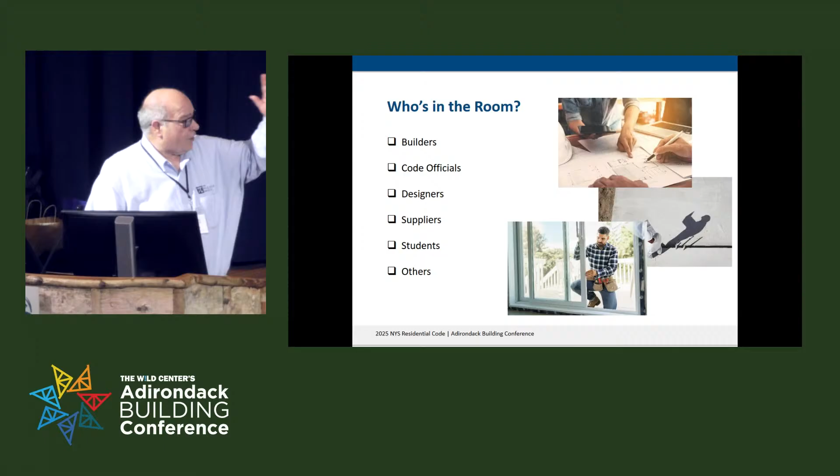In this new code, well, in your day-to-day work, but in the new code, what do you guys find is your biggest challenge every day building? I know the code officials, their biggest challenge is probably, I'm speaking for you, but there's a new code here. I've got to get everybody on board to understand what it is I'm asking for so we can start getting the plans. The designers, you probably are saying, what do I need to design? It would have been nice to know 6 or 8 months ago what I needed to do for my projects that are now. Would have been nice to have the tools like REScheck and COMcheck and so on already built.

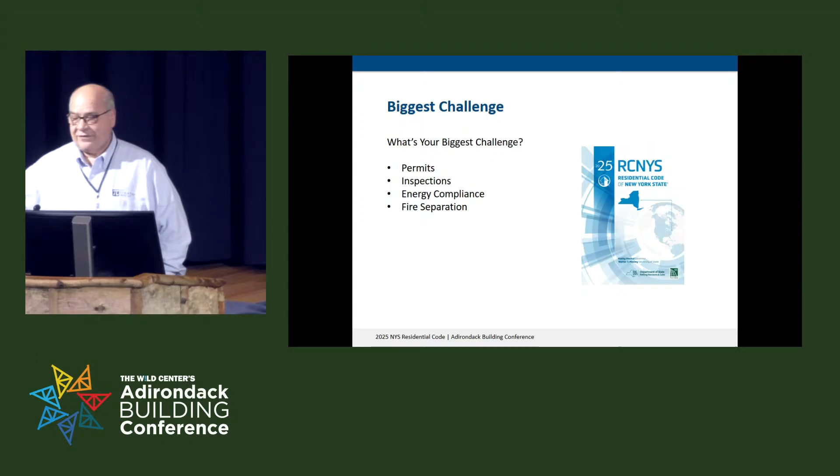They were in the works, by the way. I'm a private consultant, but I am a contractor for NYSERDA too. So I work with Chris Scroy, who was here this morning, and I can tell you that we had put all that stuff out for proposals. It was under contract, and we got it done as fast as we possibly could. You got to remember, the code really wasn't finalized until like September or so. So it was hard to get.

And plus, the people who do REScheck and stuff, they're also a government agency. If you can imagine how hard your life is, try taking two government agencies and trying to get them to agree to do something. Doesn't work. So anyway,

hopefully, maybe one of these four are your biggest challenge. We're going to talk about the fire separation part of it today anyway, because there's a new emphasis on some of that stuff as well. I'll try to keep the energy part out of my head, but they go hand in hand, and that's why I liked having the residential code with the energy code today.

We're going to cover kind of what's changed. We're going to talk about some changes with administrative requirements and documentation. We're going to talk about fire and life safety changes. And I am only going to mention energy code because I don't want to have to change my presentation every time I do it. And it's still in there. You guys got enough energy code today, but it doesn't hurt to reinforce a few things.

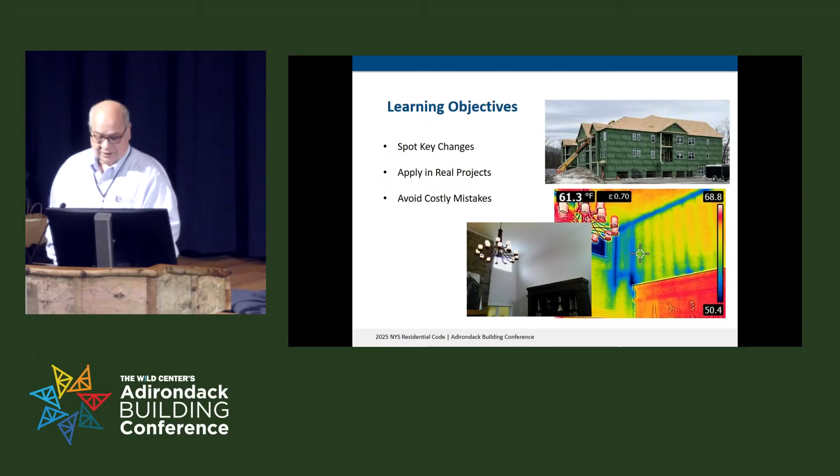So I'm hoping today you'll be able to spot the key changes in the code, because if it didn't change, we've already been doing it, let's just keep doing it, right? We'll be able to apply these changes in the code in real projects. We'll also hopefully be able to avoid costly mistakes. Avoiding costly mistakes is going to come from a lot of thinking about your project ahead of time, thinking about what's needed ahead of time. Your resources.

All right. As you all probably know, our code, the 2025 Residential Code of New York State, is a modified version of the 2024 IRC. Just like all our codes, they're modified from the International Code Council's. So that's your biggest resource, is our code. Don't follow the IRC so much. You want ours. There were a lot of significant differences in ours than there is in the ICC version.

However, having said that, one of the books I do like is the code and commentary from the International Residential Code. Even though that's not specific to New York, it is very handy for you. The commentary covers the explanation of why and really what it means. It kind of puts it in layman's terms for us.

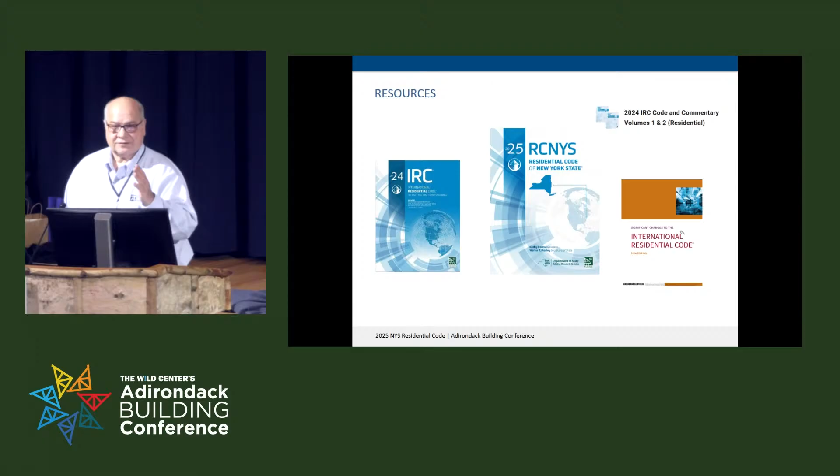And so that's handy. There's also a book that the ICC puts out that's called Significant Changes to the International Residential Code. That's a handy book as well. But again, remember, don't take it verbatim, because it is not the New York specific version. So my stuff today is based on these three things. How do you get the codes?

Now, if you're a code official, Kevin and I have been talking back and forth this week. NYSERDA funded purchase of a bunch of code books for the code officials. It's been dealt with through the DOS, and there was a survey that was put out last year sometime asking every jurisdiction how they wanted their book, whether it was a PDF or a hard copy. However you responded is how you got it.

The PDFs have all been sent out. The PDF rights or permissions have already been distributed. I believe the hard copies have not come yet or are coming. So if you're an authority having jurisdiction here and you don't have your book, if you replied to that survey, which I think almost everybody did, you should be getting it.

Yes. Thing about that, I was at a state training. Got our books. You should have your books for at least a month or two. They actually did a pretty good job getting them out to print, getting them ready, which I'm surprised. And it's nice that this time it's a New York version rather than having to go to the ICC version and then take our amendments and then take our past amendments and so on. But thank you for that.

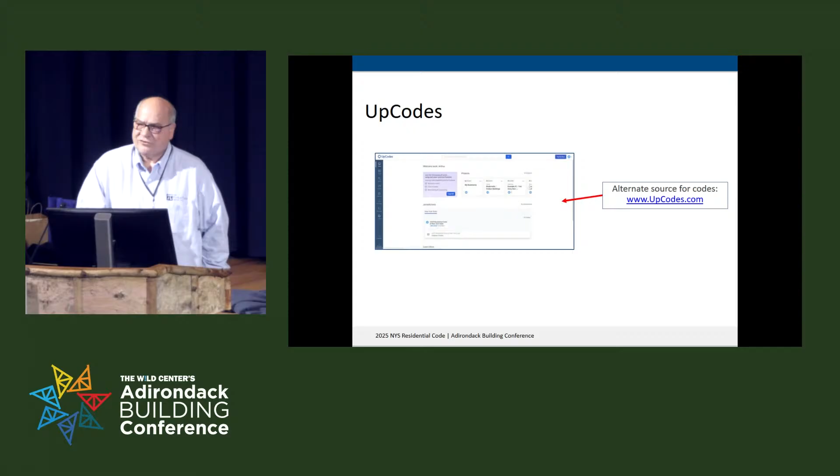If you have the subscriptions, they have diagrams. When you search their stuff, it's a much better search than the ICC, as far as I'm concerned. So that's another place. There's no excuse not to have the codes because they're available for free either place. Again, for code officials, if you didn't get them from the state, your department's got to pay for them. It's your tools, right? They got to pay for them. All right, so that's just a little bit on that.

Let's talk about some of the administrative changes. The first one is information on construction documents. Section R106 talks about this. Now, this is a little bit condensed, right? But if you go to the energy code, you're going to want to see a whole list. There's 19 items at a minimum that they want on the construction documents for the energy code. As far as our specific things, and these are all New York specific, they have to be clear. Clearly define the work, the location, the nature of the work, the extent of what's happening.

I've seen some plans, and I can only imagine what you code officials have seen out there. You talk about napkin sketches, that would be a good thing some days. Maybe some of this on bark, or a set of plans on a 2x4. Depending on what you're doing, that really doesn't work. It's also hard to file, right? Well, it's not hard to file with a file, but it's hard to file with your work files.

So the point is, give a good set of plans, right? Make them clear. Make sure they show all the work that needs to conform with the uniform code, the energy code, and other applicable stuff. We keep talking about manufacturer's instructions today, right? If there's something that's required, New York specific, fireplaces, right? The old fireplace boxes, they have to be UL standard.

All right? Otherwise, it's a waste of everybody's time and effort, and we're not getting anywhere. So make sure your required documentation is there, whatever is required by the code and specifically by your jurisdiction. Oops, too fast there. Make sure the drawings are to scale, right? It actually says that in there. Trying to move down to my notes a little bit. Make sure the dimensions are drawn to scale, legible.

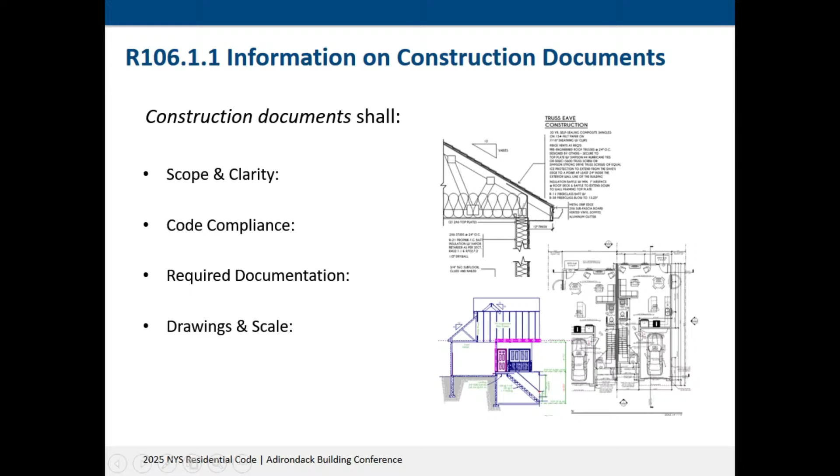Now, how many of the code officials here, does your jurisdiction take online permits? Ever? Good, good. If they don't, that's another program coming out from NYSERDA - we're setting up online permit application software for any jurisdiction in the state that wants to do it. So tell your bosses to keep their eyes open. Maybe they will, or if you're the boss, keep your eye open. Pay attention. We're going to be paying for at least a year of it and helping get set up and offer training on it and so on.

That's good news to the rest of us, right? It's a lot easier to submit things online. The clock isn't there. If you're in a jurisdiction where somebody's only there part-time or whatever, you don't have to wait till they're open and so on and so forth. But you got to make sure you scan that napkin before you send it in with the application. Otherwise, you can't just submit that in person, right?

And anyway, so that's the first part. Let's make sure that our plans are clear, the scope is well-defined, they show compliance. One of the things the energy code is going to tell you is you've got to choose the compliance path that you're going to be following. You've got to, in some cases, show a lighting power density now, even in residential.

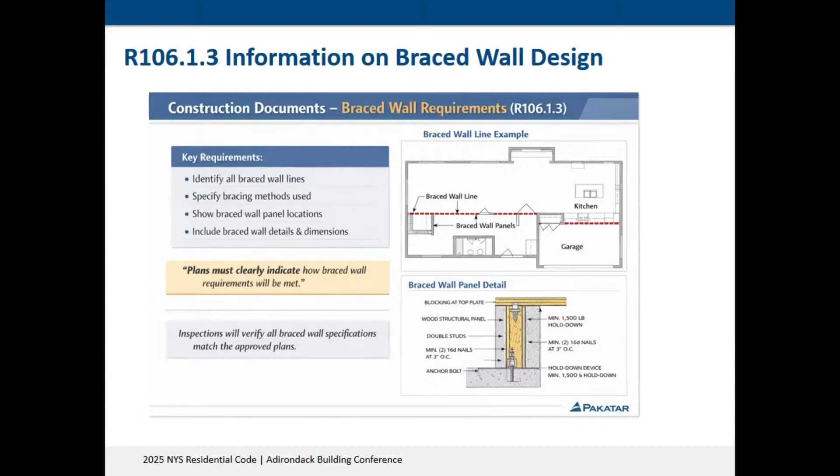The only reason we got a new code before then was because of the stimulus money, the ARRA money they were throwing around to get states to adopt new codes and save money and get to 90% compliance. And then nobody did anything about it, and our standards have all rolled back to before then.

Anyway, braced walls. It's up and up and up. Now we want the location of the braced walls shown, right? We want to specify the methods we're using, whether it's site-built or a panel. There's two different terminologies, so make sure you've got what it is you're going to do.

Show the locations, right? The plans have to clearly indicate that these requirements are going to be met. The inspections are going to verify all the braced locations and wall specifications. They have to match the plans, right? So there's another thing.

You're going to do the work early, so when they come out and inspect it, they don't say, where's your braced plan? Where's your braced walls? Where are they supposed to be? First of all, he wouldn't have given you the permit if you don't show them. So that's going to be your first delay.

Time is money, right? Time is money. The longer it takes to get that permit, the longer it is before you get that final payment on that house and close it, the more interest you're going to be paying while you're building it. So show the braced walls.

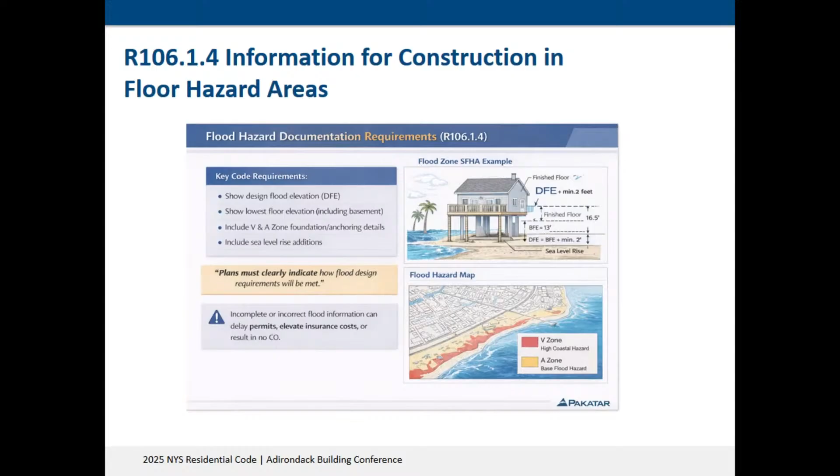If you're building in flood zone areas, you have to show the design flood elevation. You've got to show the lowest floor elevation, including the basement - what that elevation is. You have to include the V&A zone foundation anchoring details, and you have to include all sea level rise additions. So this is all part of building a more resilient home too, knowing where you're building.

Even those lakes - it's not just, I show a picture here of palm trees. We've got those here in the North Country, but I don't know, we don't have them in Albany. I just did that for here. Anyway, you must clearly indicate how the flood design requirements are going to be met. More information, clarity on the plans.

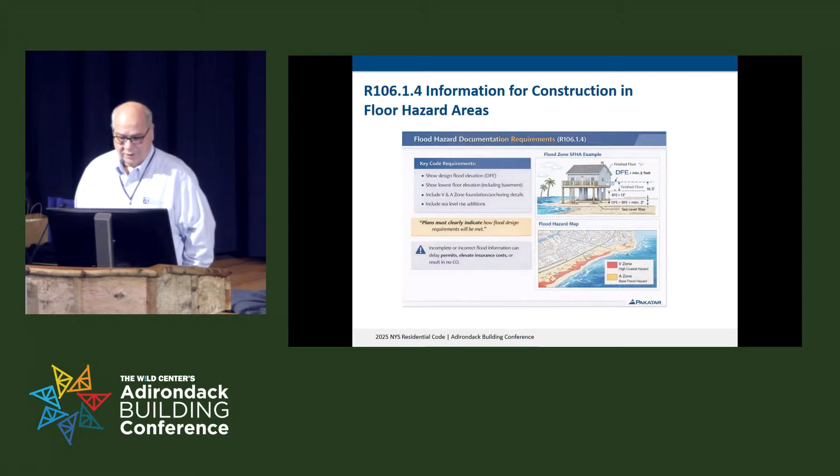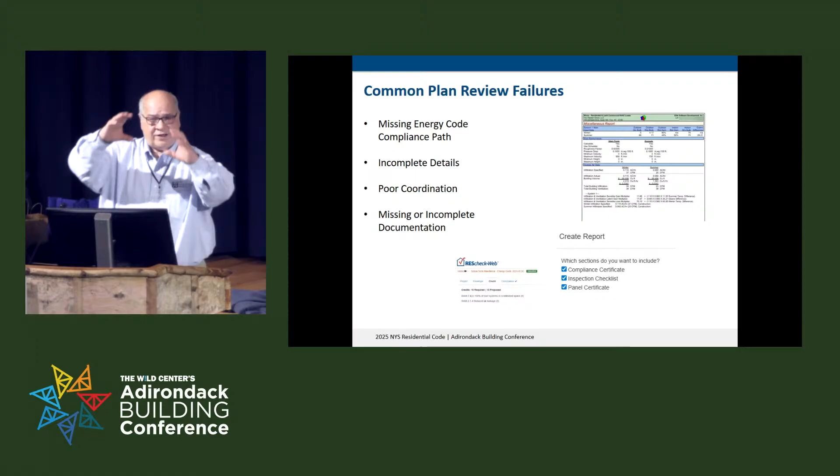You also have to show a detail where it changes from the wall to the roof - we've got to show a detail of that, right? We got to call it out, balloon that out or something. That's one of the incomplete details. If you just show me a red line, I don't know how you're going to make that happen. I want to know how that's going to happen, right?

My first job as a plan reviewer is to question. I'm not saying that I know better than the designers. I'm just saying that I need to know what your intention was. Because if I'm not figuring it out, how can I expect the builder to figure it out? Or how can you expect the builder to figure it out? And how are we going to know that it gets done? You don't want us all guessing and we get out there on the site and we have to fail an inspection, or whoever the third party is, if there is a third party.

So poor coordination, right? We're not communicating back and forth - who's doing what? Missing or incomplete documentation, same thing. Do I have the manufacturer's installation instructions? Do I have my manual J report? Do I have the Res Check?

This one image of the Res Check is where it tells me I've got my 10 required. I'm required to have 10, I've got 12 - proposed. I just took a screenshot. The other one is, what am I going to print?

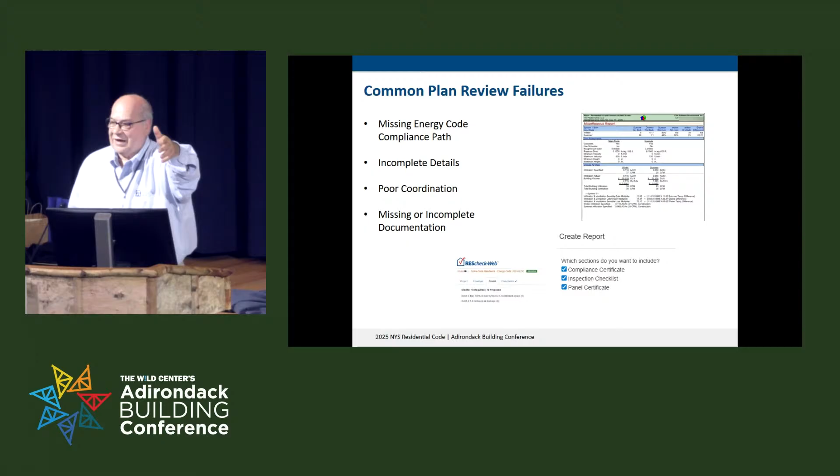If I'm submitting something using ResCheck, I submit the compliance certificate, I submit the inspection checklist, and I make sure the builder has that panel certificate so that they can just fill it out and put it where it's supposed to be. However, the panel certificate that's provided with ResCheck doesn't quite meet the new code requirements. So I've asked PNNL to see if they could modify it, but that's a huge lift for them.

Give me a break. So they can write all this other stuff, but they can't make a form that.

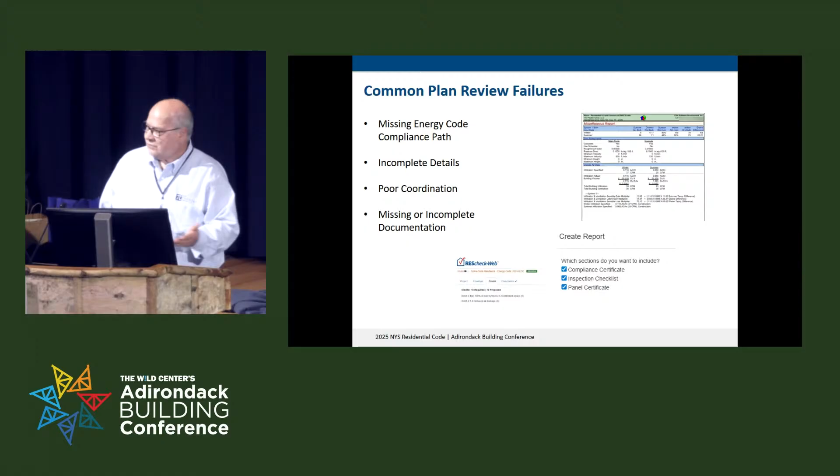They're computer geeks. How is it hard? It's all they do is mess around with computers. I could probably get my 9-year-old grandson to figure it out for me. But anyhow, these are the types of things that we're seeing coming, that I'm hearing about coming back.

We want to look for that. We want to be careful. Designers, do the work early, and make it happen for us.

Builders, we all know too that residential, the sophistication of what we do varies. We may be building a little shed, or we may be building a multifamily apartment project or a bunch of townhouses. In other words, there may or may not be an architect involved, there may not be one needed. It might be the builder doing his own type of stuff.

So I'm saying it to all you guys, do good plans. Include the stuff on there. The best way, one of the things I found, because I used to work as an estimator too, so when you get old like this, you've done a lot of things. What I always found was when I'm estimating, I know a good set of plans because I'm looking for that information. If I can't estimate it, I can't build it, because that's what I'm doing when I'm estimating, is I'm building it. So think of yourself as an estimator when you're putting together a set of plans.

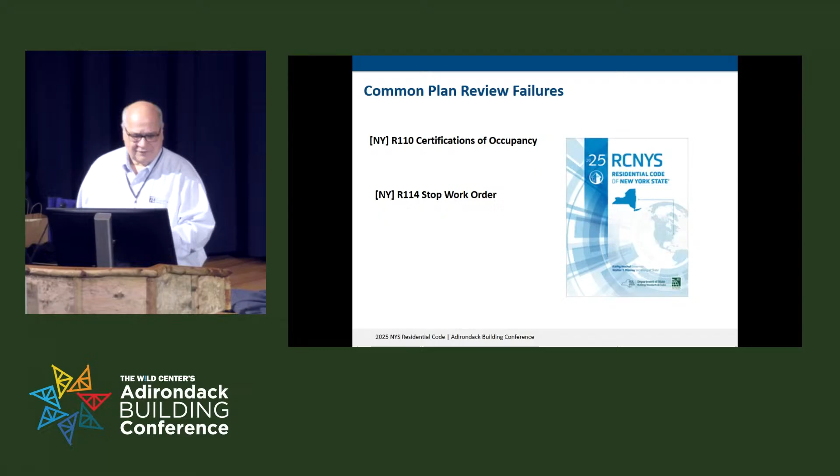But no living there. When I went into a house, I did a blower door test last week. Guy says, I need this test today, I'm trying to get the CO. He's installing the cabinets, they're installing the water heater. I'm saying, who's gonna live here today? Whatever, just write the check, bud.

Okay, so next, this is where we start getting into the interesting stuff, right? That was just time fillers before. Now we're going to get into some more of the interesting stuff.

Fire and life safety is all the old code official guys ever dealt with until this pesky energy code started getting legs over the last 10 or 15 years. Now that takes up everything, and we don't get a chance to deal with fire and life safety as much as we used to. That's why a lot of them are retiring.

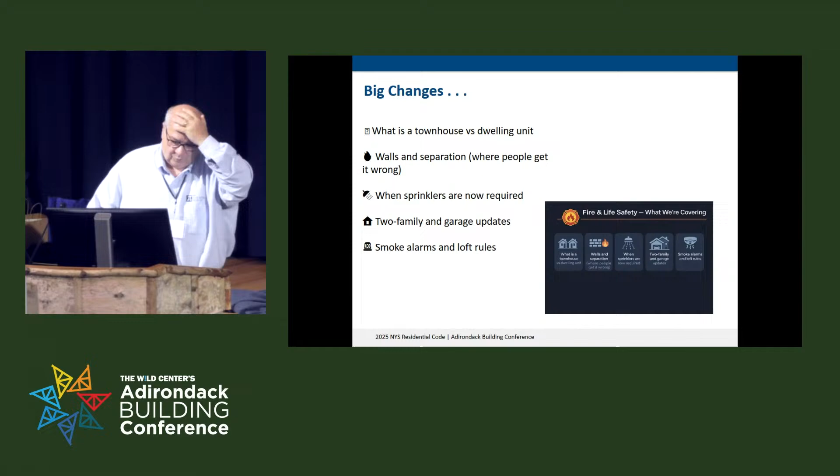So first, we're going to start with the definitions, right? That's really what's driving everything. My problem is I have most of my notes memorized, but I have too many notes because they say don't put anything on the slides. I'll speak it, and I haven't remembered it all yet. So I'm going to try to remember for you, right?

Yeah, and now, oh, there it goes. But before it was changing this... Oh, thanks, that's because I'm working right-handed. I'm working with a handicap, I'm left-handed. Okay.

Walls and separations, that's our first thing, right? This is where we get it wrong. There's a lot of different types of things. We'll look at that a little bit more in the next few slides.

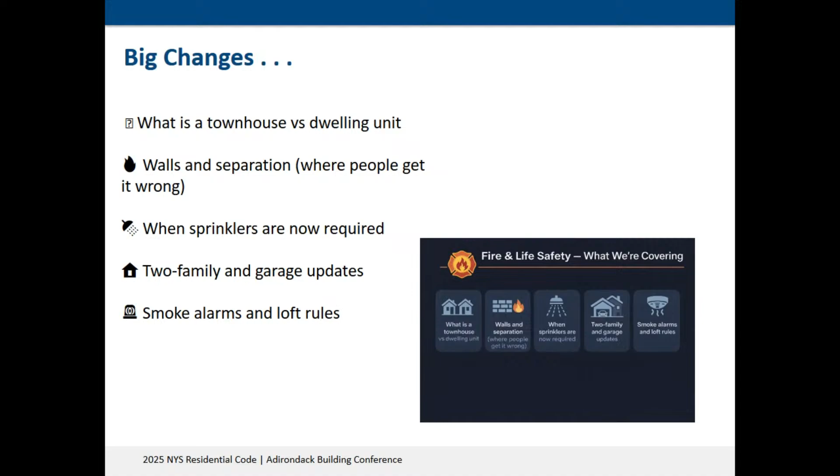Sprinklers, we're going to talk about that some more in the next few slides, this is a big one, we're going to talk about when they're triggered. When do you need sprinklers? To me, that was a big change. I don't know about the builders, probably not too big a change for the designers because it ain't coming out of your pocket. But you still got to work around it.

Two families and garages, there's some clarifications and some stuff there. And smoke alarms and lofts. Lofts actually have a definition now, right? That's probably popular with these weekend houses and stuff like that, the smaller ones, not the 10,000 square foot ones the guy was telling us about before.

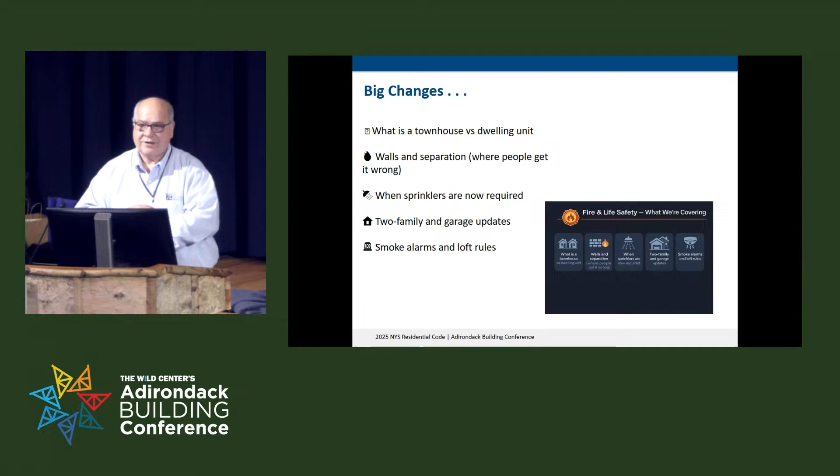First, we'll start with the definitions, right? The code says townhouse refers to the entire building, not a townhouse unit. The entire building has to be 3 or more units in order to be considered a townhouse. So our 2 units are not, right?

They have to be 3 or more units, and it's the entire building. Townhouse unit was added, and that refers to a single dwelling unit within the townhouse. The dwelling unit is just a single living unit in either a one-family dwelling, a two-family dwelling, or it could be a townhouse unit.

All of these definitions are in Chapter 2, which reminds me of something I wanted to mention. To me, one of the most important parts of every code we deal with - energy, fire, building, residential - is Chapter 2, right? That's where you go to find out what it is you're talking about. When somebody refers to something, you've got to go there and look, because it means something different in each one of these. Not always, but sometimes residential has a different definition in the energy code versus the building code itself. So refer to the code you're working in and refer to that definition.

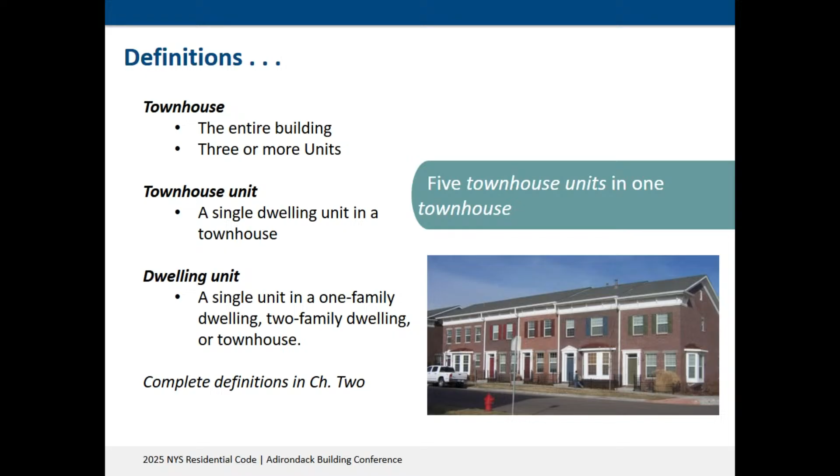Just 2 seconds ago, you all probably would have thought I was talking about a townhouse when I was talking about just the townhouse unit. See? And it's not a townhouse - it's 1 and 2 family dwellings. So Chapter 2 is important.

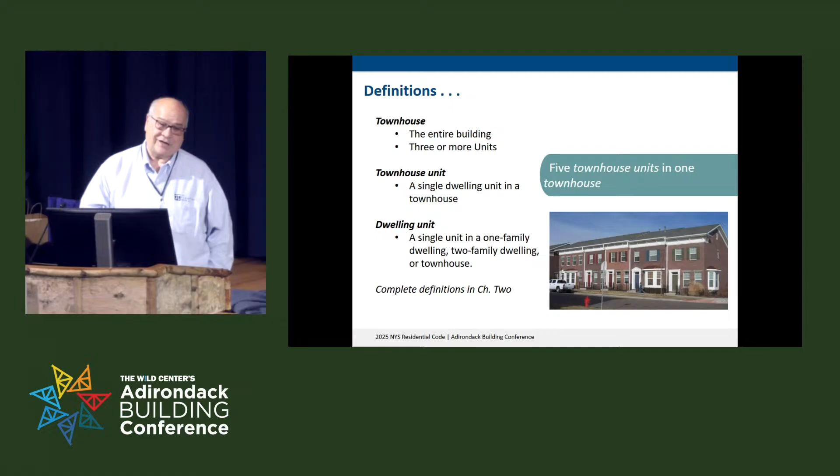I also use the index a lot. If I'm using the PDF, I use the glossary a lot because it jumps me there. But mostly I do it online.

Where do we get it wrong? The exterior wall construction, fire separation distance, townhouse walls - all of those are dealt with now. The exterior walls under the new residential code, we're really talking about how close your building is to the property line, and whether or not the home or building is sprinklered. Because it makes a difference.

We're going to look at that more in the next slide, but for the exterior wall construction, that must comply with the fire separation requirements - you're going to remember this now, I'm going to quiz you on it. Table R302.1, Table 1 or Table 2. Table 1 is for non-sprinklered buildings, Table 2 is for sprinklered buildings.

The fire separation distance - that's the distance measured to lot lines, or to an imaginary lot line between the townhouses on the same lot. I'll show you that in a second. And the townhouse walls are just shared walls. We'll call them tenant separations - well, they're not tenant separations because they're not tenants, they're generally owned. But it's townhouse walls or separation walls.

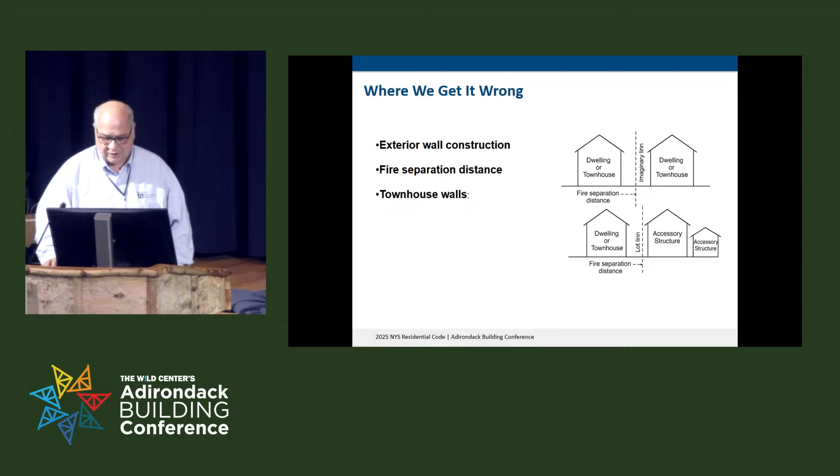And here we go. The fire separation distance now applies to walls between the single units - these purple walls. It's going to be the fire separation distance between the units in a single townhouse building.

If they're on separate lots, that's measured to the lot line. If you look at the picture, on the left is the lot line - there looks like there's a little bit of separation. But then we've got the green lines in between - those are our imaginary lot lines, just made up by the association. When you've got to deal with that, the interior units - those are the property lines that we measure our fire separation distance from.

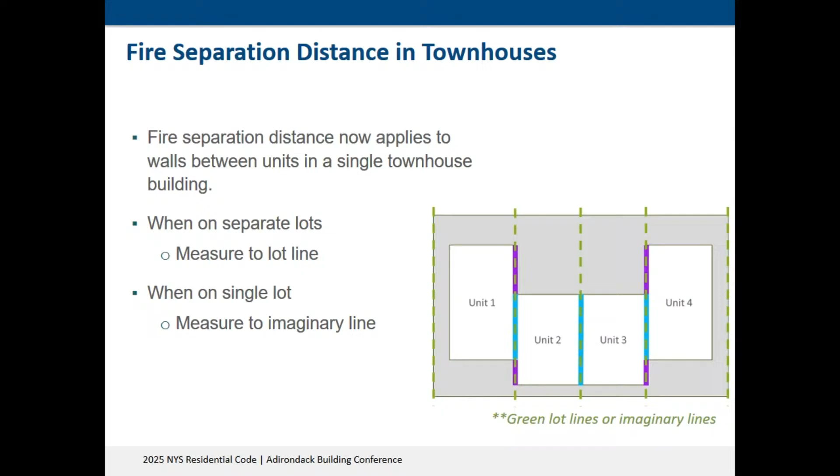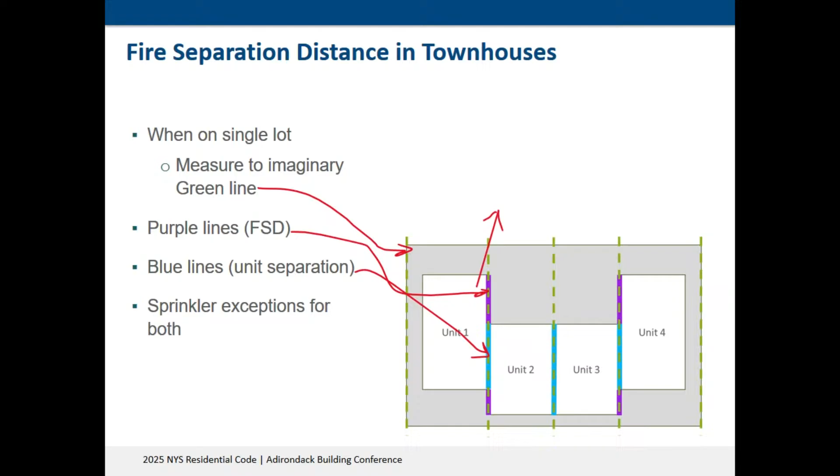The blue lines are, for lack of a better word, the tenant separation - it's the common walls. And we learned earlier today that they not only have to be insulated, but they have to be sealed, so we don't see the frost lines on the roof where they're separated.

Yeah, I was paying attention, Kevin. And sprinklers - there's exceptions for both. We're going to talk about the sprinklers here in a second.

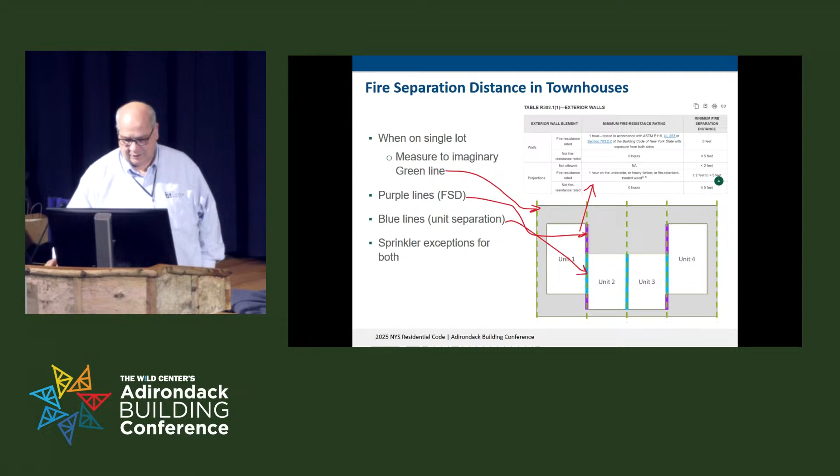Just making sure. Here's just a - this kind of summarizes it all for you in one graphic.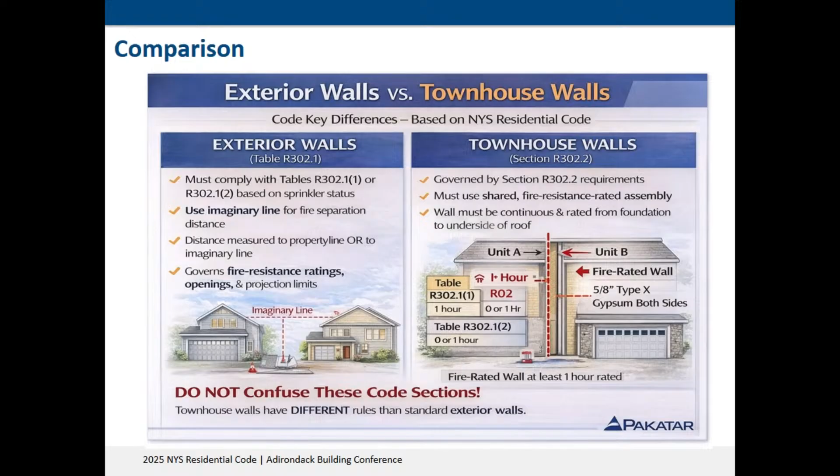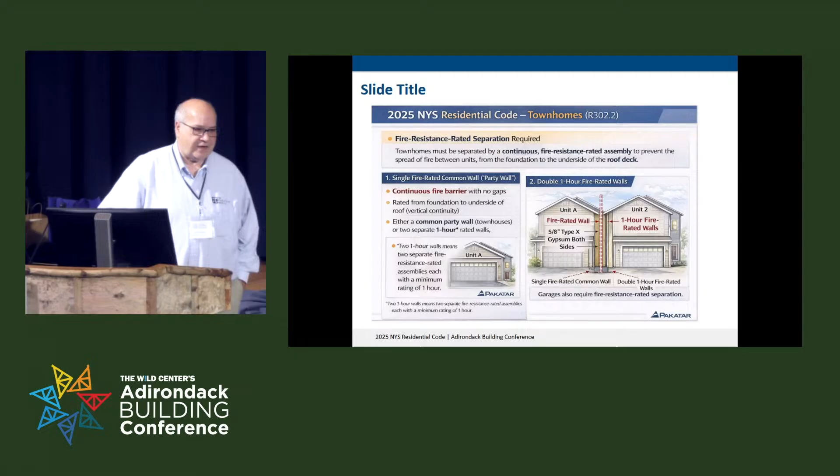Here's the comparison. I'm sorry, that last one wasn't. So this just shows you the distance between the imaginary lines. It's good for reference. Question. Sure. Is it single fire rated? From the top of the foundation wall. Cross wall? From the top of the foundation wall. 2 feet on each side. Yes, typically. What you're usually going to do is it needs to be a 1 hour wall.

The code doesn't tell you how to build a 1 hour wall, right? So you have to get the design number, either the UL design number or National Gypsum or USG or somebody's book with a design number that's been tested and approved that tells you specifically how to build that. You need to have that either on the plan or the written cut sheet there for the code official. Unless it's their first day, they've probably seen it before. If it's the builder you've seen build this before, you're not as hard on them, but anyway.

This underside, through sheathing, yes. And then most of the time it spreads out 2 feet on either side.

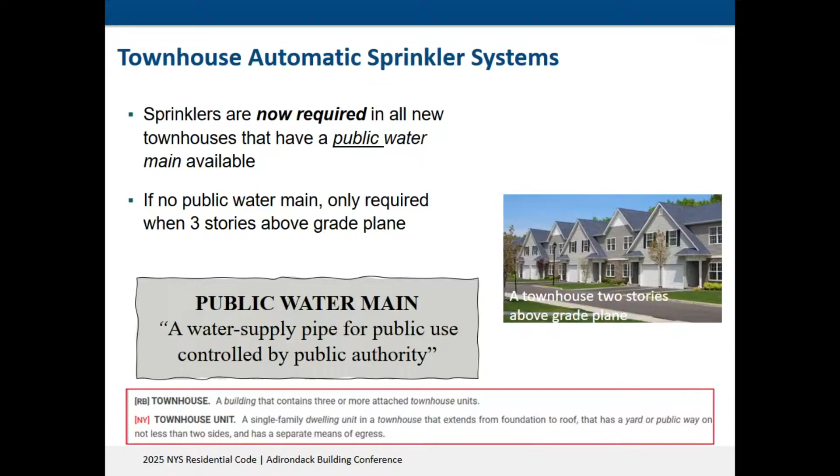Okay. Sprinklers. Sprinklers are now required in all new townhouses that have a public water main. Whether it's 1-story, 2-story, 3-story, it's required to have sprinklers if there's public water. If there's no public water main, then it's only required when it's 3 stories above the grade plane. And the code tells us, in the definitions, that a public water main is a water supply pipe used for public use, controlled by a public authority.

So that's the big thing, the biggest thing I got for you guys all day. So you can go now. Honestly, when I was first reading the code, that got me. I said, whoa, that's a big one. At first, I was thinking the same thing about 2 units, side-by-side, till I understood it better, because that's a big change if it's 2 units. But since a townhouse is only 3 units or more, it doesn't matter.

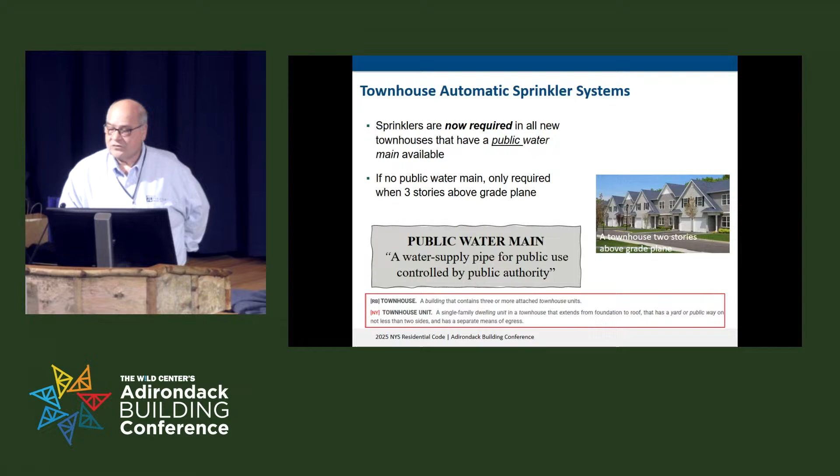So if you're building with private water, then you're good unless you go 3 stories. But if you're building 3 stories out of wood, you're going to have sprinklers. So that's a trigger to look for if you're coming up with a new project, a new neighborhood: whether you've got the water supply, whether you're planning not to, and how you're going to deal with it. There's no grandfathering on it. It is what it is.

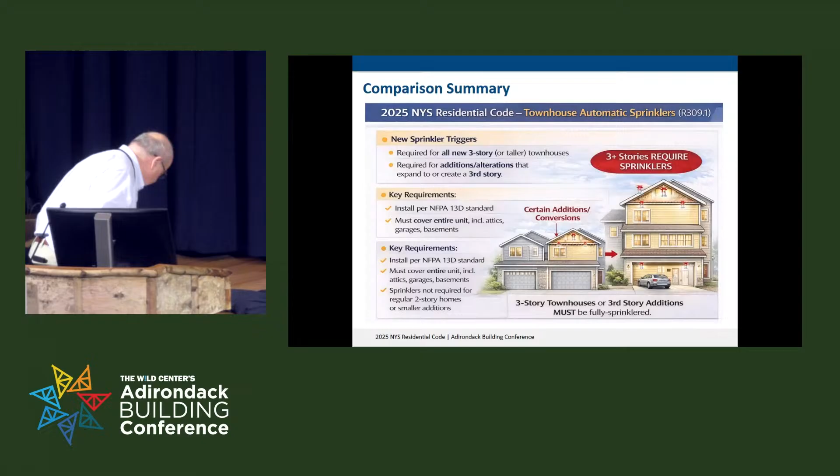It's unfortunate, but there's reasons for it. Everything with the code has to do with safety, right? They track accidents and incidents over the country over time, and they determine that things need to be fixed. Apparently, there's fires in townhouses. Not a lot. It's not running rigid pipe. It's not that big a deal.

The builders, correct me if I'm wrong, will tell you their biggest thing with sprinklers is what if they go off. Geez, they're going to go off and ruin everything. Yeah, they're going to ruin everything and probably save somebody's life, but they can go off accidentally, is what they're saying. They don't want it being another warranty issue.

It's the big fight in building, other than the stuff with EnCon and the site stuff, and electrification, right? Because that's going to end the whole world of building. You guys are never going to be able to build another building once you have to be all electric. I'm sorry.

I do think we could do it a little bit different. We could pace our way into it, but ultimately, it's not the end of the world. In Massachusetts, they have your base code, a stretch code, and a super stretch code, right? The super stretch code is really their electrification code. If you don't want to build it all electric, then you can build the way you want, but you have to prepare it to be all electric. So when somebody wants to change their range out, they'll have to go to an electric and so on and so forth. But it's an option. And if you think that's cheaper than building with electric, then go for it. I think that was a pretty good way to bridge the gap.

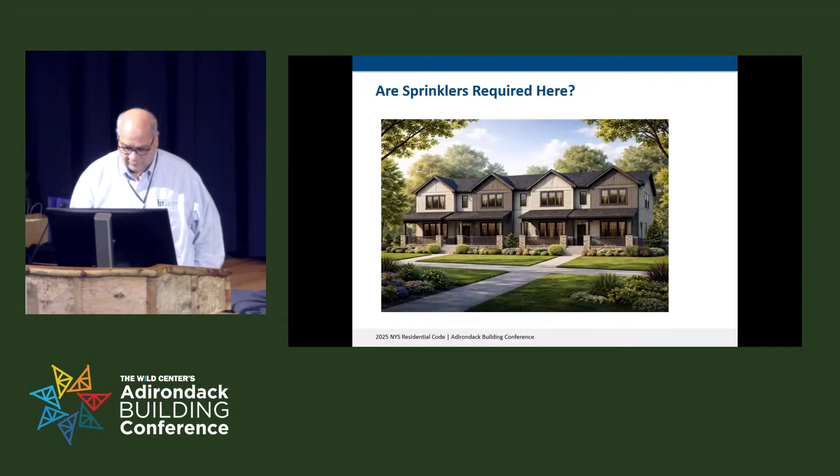No, that's 4 units. But don't they have... It may be how far you are from a hydrant. That might be a local... Yeah, that's a local law. That's not statewide that I'm aware of. Okay, how about this one? Sprinklers required here? Yeah.

Now, I asked ChatGPT to make me an image of a 3-unit townhouse building, 2 stories tall, and it gives me this. But it looked good, and it got through, so. But it gave me that one, too. First time it gave me that one, it made it 3 stories, even though I asked for 2. But it beats drawing it myself.

Okay, so we're out of townhouses. We're all good with the townhouses. We know they may need sprinklers. We know that we've got fire separation distance issues that we have to consider. We have common walls, what's an exterior wall? We're all good with that. Let's go to 2-family homes. They're a lot simpler, right? Been building them for a long time. Well, been building townhomes for a long time, too.

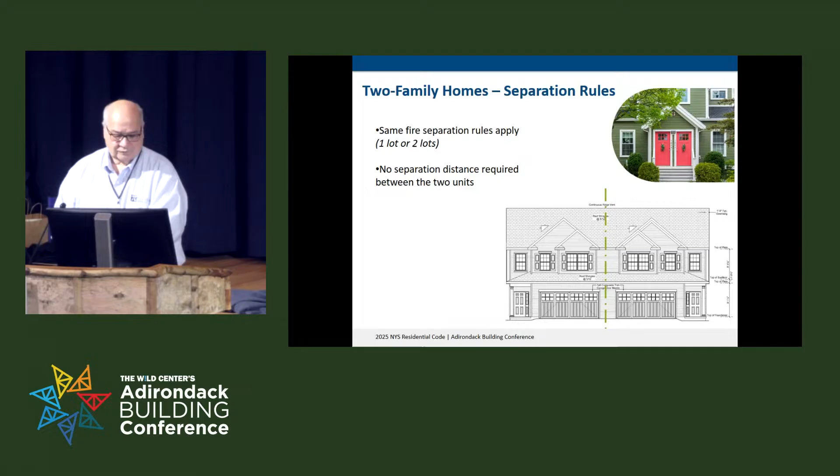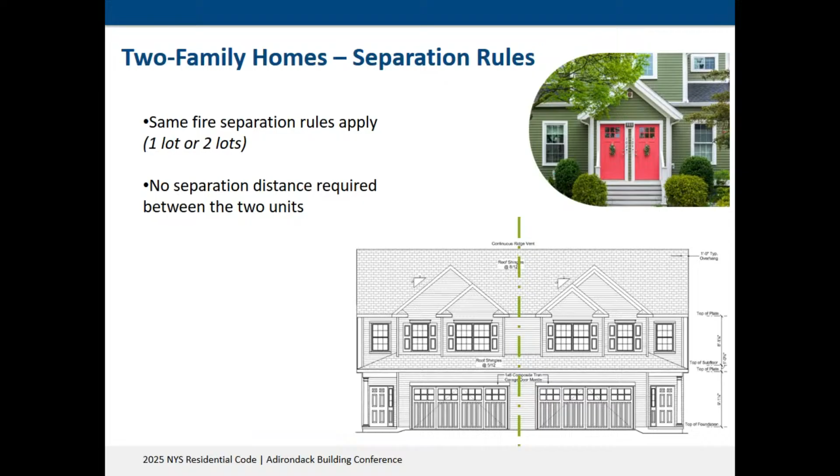It doesn't matter on a side-by-side 2-family where the lot line is. It's 1 lot or 2 lots, the separation between the 2 units is the same, right? There's no separation distance required, unlike a townhome. There's fire rating in that common wall, but there's not any separation distance. Unlike townhomes, we can vertically stack the dwelling units, right?

If we do, you have to provide a notification appliance in each unit that connects to the smoke alarm system in the neighboring unit. So when my wife burns dinner every night, then the people next door are going to get annoyed. Unless she really does a good job and it's like, hey, get out of here. Right? So when there's no sprinkler system, you need a notification appliance.

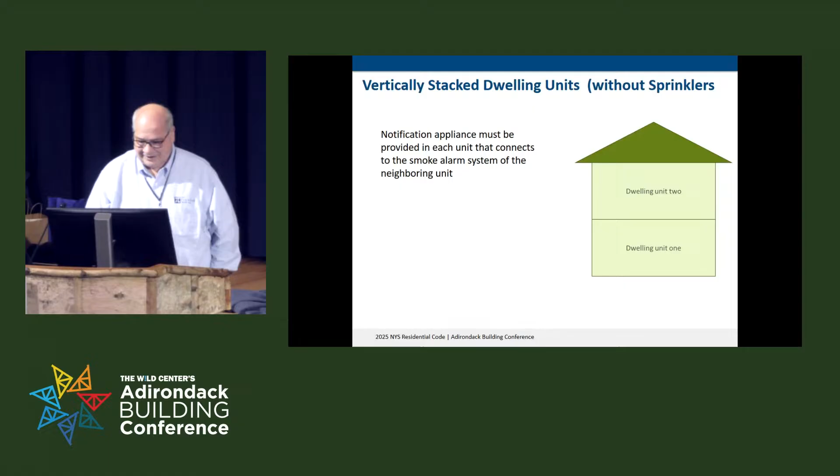Now, that's not a term you usually hear in the residential code. That comes from the fire code. Right, so if you want a better definition or options for notification, you want to understand more about it, go to the fire code. We'll hold that class at 4:55 today. No, sorry. Never if I can help it. Just too complex for me.

Here's the definition from Chapter 2 of the Fire Code. The fire alarm system components such as a bell, horn, speaker, light, or text display that provides audible, tactile, or visible outputs or any combination thereof.

Here, we're seeing what else we've got to do, right? The red line is separation between the stairways. Interior stairways that serve the upper unit must be constructed in a manner that limits transfer of smoke. There's got to be a smoke wall between the stairway and the units. The blue line is the fire-resistance-rated assembly that goes between the units. And when you're looking that one up in the UL code, make sure you're getting one that's suitable for floors, right?

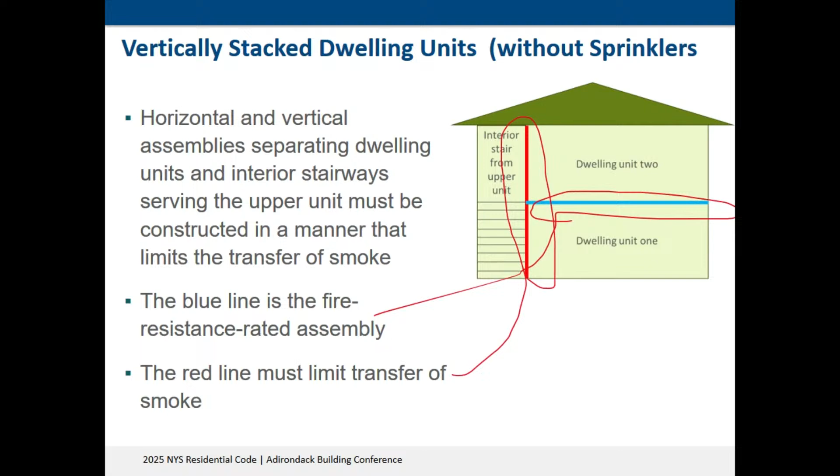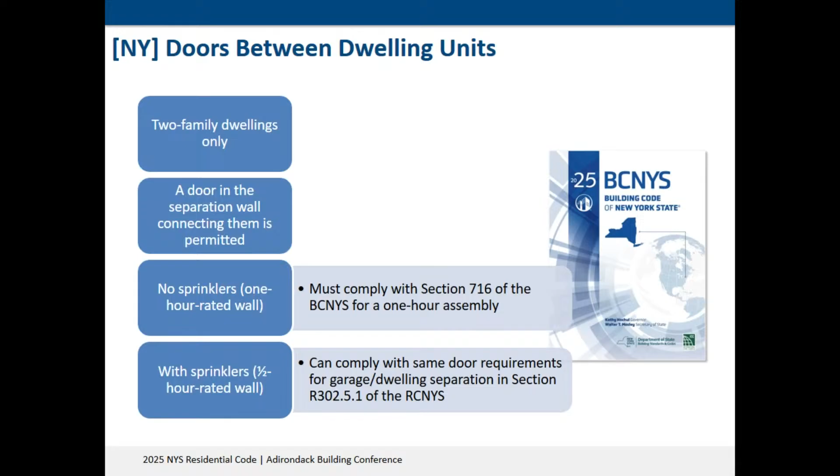Now, two-family dwellings are permitted to have a door between the two units in the fire resistance rated wall. You can have a door between the walls. Before, you couldn't do that. Now you can. If the building does not have a fire sprinkler system, the door must comply with Section 716 of the Building Code of New York, the commercial code, for a 1-hour assembly. When the building is sprinklered, it must just comply as if you're going between a garage and a house, C-label door. Okay, that makes sense?

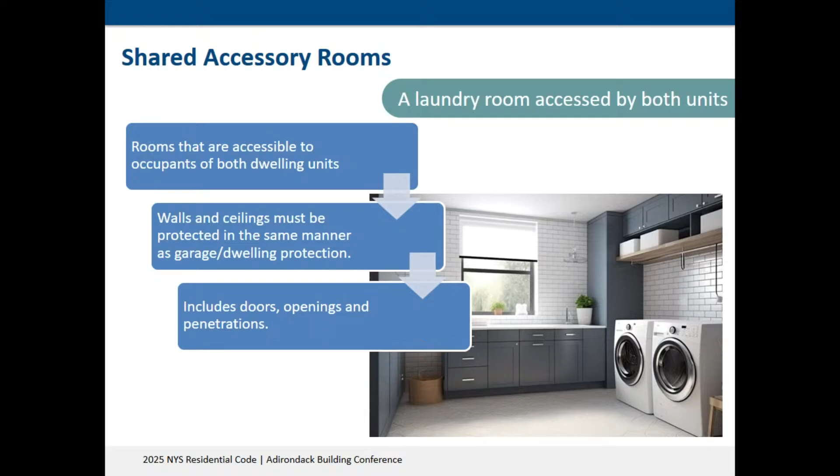Shared accessory rooms, if there's a common laundry room in the building, or whatever, a common room. This is a new section as well. It recognizes that you might have shared accessory rooms that are accessible from both units in the two-family, like a laundry room or a garage.

It's really identical to the protection required for a garage dwelling separation. Again, you need the 1/2 inch on the wall, and the one side 5/8, and then 5/8 on, depending on what the ceiling's like, or above it. And the door has to be the C label. So if you've got a common accessory space, it's got to be treated like a garage. So the walls are rated, the ceiling's rated, the floor, if it's on an upper floor, it's got to be rated too.

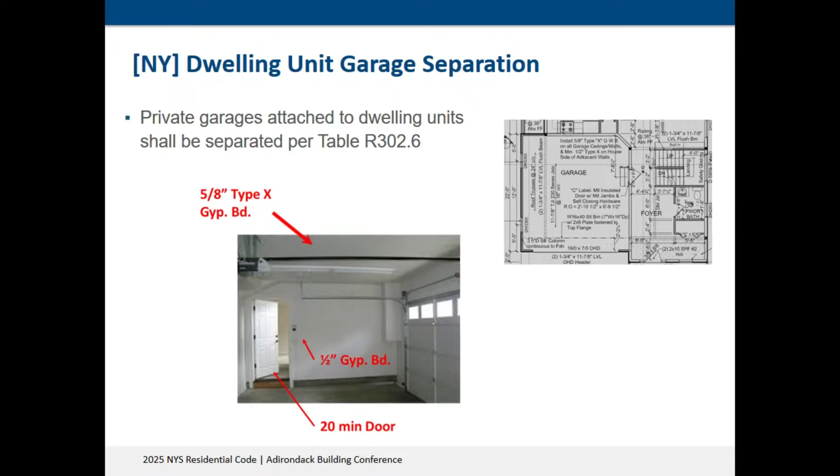All right, private garages that are attached to dwelling units, separated, like I've been saying, in Table R302.6, 5/8 Type X if there's habitable space above it. The walls are 1/2 inch gypsum and it's a 20-minute door.

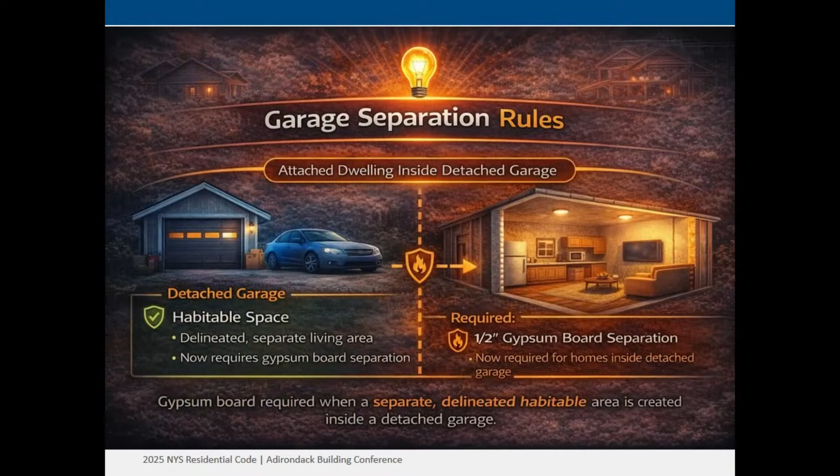Detached garage. This is kind of newer and a clarification, and it really hasn't been at the top of our list of catching it. But the garage to dwelling separation rules now apply even inside detached garages, if you create habitable space. Detached doesn't mean exempt anymore. If you take a detached garage and you add living space inside it, you finish it off, or you design it with separate habitable space from the start, now you created a condition where separation's required. If it's clearly defined as living area, that's what triggers this requirement.

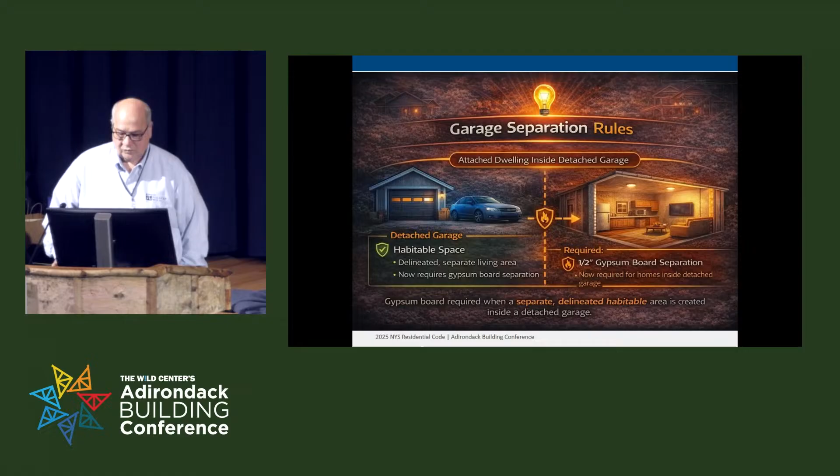You need gypsum board separation between the garage and that habitable space, just like if it was between a garage and a house. Whether or not there's a bed in the garage? That's correct, if it's habitable space. So the question was, is that required even if there's a bedroom or not? It's just habitable space is what they're saying. So it's like a garage with an apartment above, or, even though it's detached, a garage with a finished room or an office inside. Convert a garage space, all of those trigger this.

Okay, so the question was, what if this was like a boathouse where the boat's below and they add living space above it? That's a good question. And what was the second part? Oh, an ADU, yes, definitely. If it's a boathouse, I would say yes. No living space above, oh, that's an APA regulation. Building code, I would say it's like a garage. I would say read the definition.

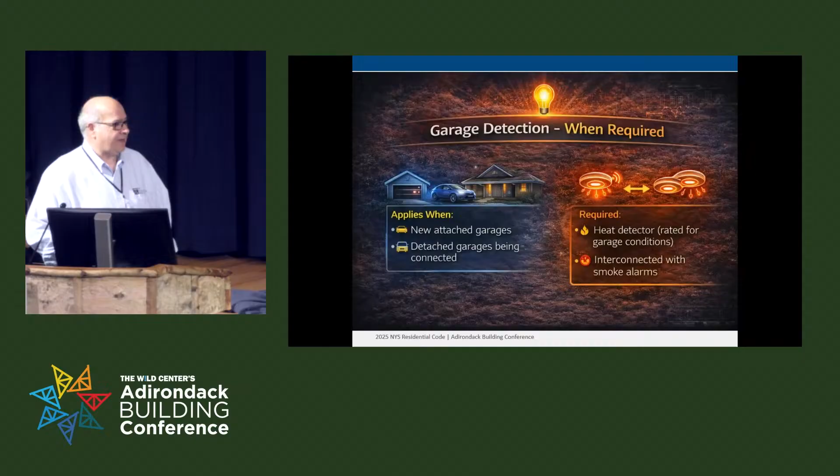We're required to have heat detectors in a garage anyway. So you need to have heat detectors rated for garage conditions, and they have to be interconnected with smoke alarms in any garage, whether it's detached or attached.

Oh, your boat slip. I don't know. Kevin was just starting trouble. We actually saw a boathouse, and not only was there living above, but the builder decided to vent kitchen and laundry exhaust into it. Oh, I'm not surprised. We had to argue about what a garage is or isn't. Yeah, and as it was suggested, I think we'd have to look into the Chapter 2 definition of garage and see what that is. I guess I can't really answer that. I'm stumped. If I can't answer it, I want my money back too.

The heat detector is required if you're building a new attached garage, or converting a detached garage, or maybe a boathouse, to connect to the house. The connection is what triggers the requirement.

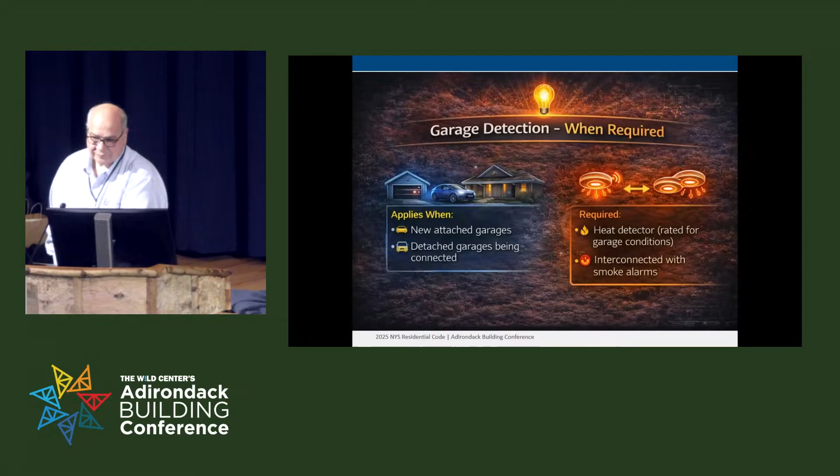Don't install a smoke alarm in the garage. You have to install a heat detector, and it has to be rated for a garage. So you're going to need a spec for that, or to prove that it is. I don't know if there's a sticker on it showing that it's rated for it.

Okay, there's some new stuff on smoke alarms and where they're located, so we're going to go through that in the next several slides. The first part is smoke alarms in sleeping lofts. A sleeping loft can be provided in any room. We'll talk more about what a sleeping loft is a little later. I realize I should have probably talked about that first, but I never can tell what comes first, the chicken or the egg. So sleeping lofts can be above a living room, or off to one side, whatever it is.

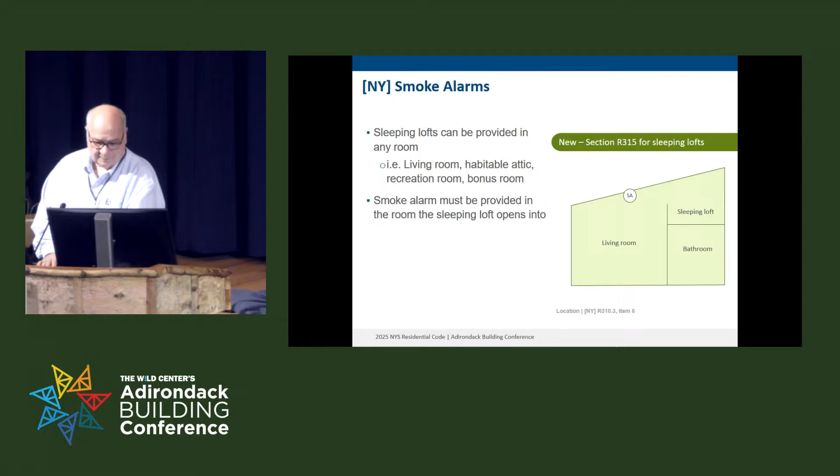A smoke alarm must be provided in the room the sleeping loft opens into. They must be located in the immediate vicinity of the sleeping loft. It's the same statement for smoke alarms required outside of sleeping rooms. NFPA 72 clarifies the maximum distance in the immediate vicinity as 21 feet, so that's probably reasonable for our purposes here.

This one seems simple, but it's where we miss the details and fail. Smoke alarms have to be installed per manufacturer's instructions. It's like we get paid extra - it's like a drinking game, every time we mention it you can take a drink.

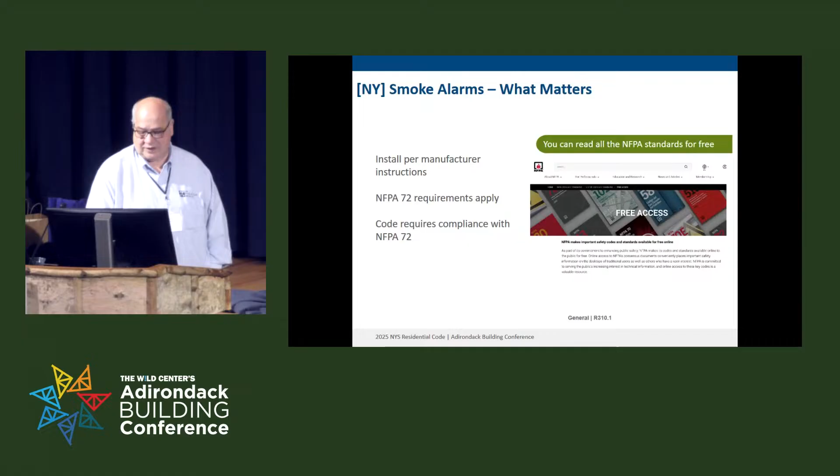Okay, so you have to install per the manufacturer's instructions, which follows NFPA 72. So it's not just the book or the box, you're following the national standard. The residential code now makes it explicit: installation has to comply with NFPA 72. So if it doesn't meet NFPA 72, it doesn't pass.

New to the residential code is a requirement that was last seen in the 1997 Uniform Code: when a hallway serving sleeping rooms opens to a room with a ceiling height 24 inches or more than the hallway ceiling, a smoke alarm is required in that room. In my graphic, the hallway and the living room show a 24-inch difference in heights, so we're required to put one outside that hallway. The reason is the likelihood that smoke will rise to the taller ceiling before reaching the lower one, which would otherwise delay activation of the alarm system.

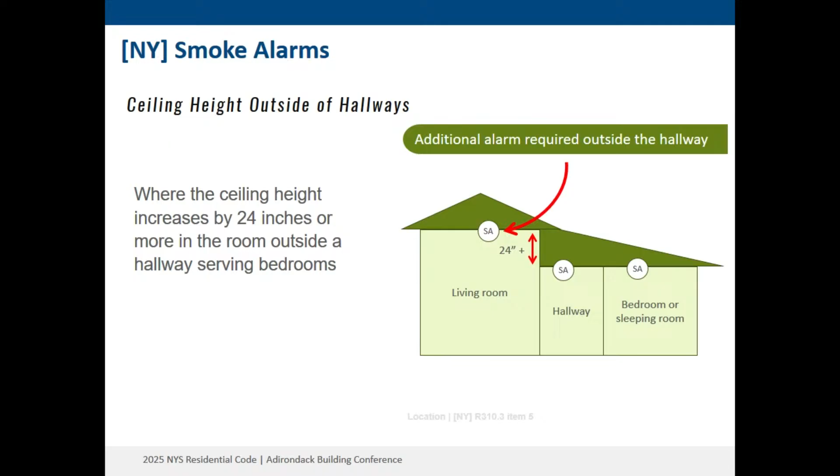Another new one that catches people off guard, especially in townhouses, is in common spaces. If you've got shared spaces in a 3+ unit townhouse, like hallways, lobbies, stairwells, you have to have an alarm, and they must be clearly audible - not just inside the units. And remember, the audible feature is important.

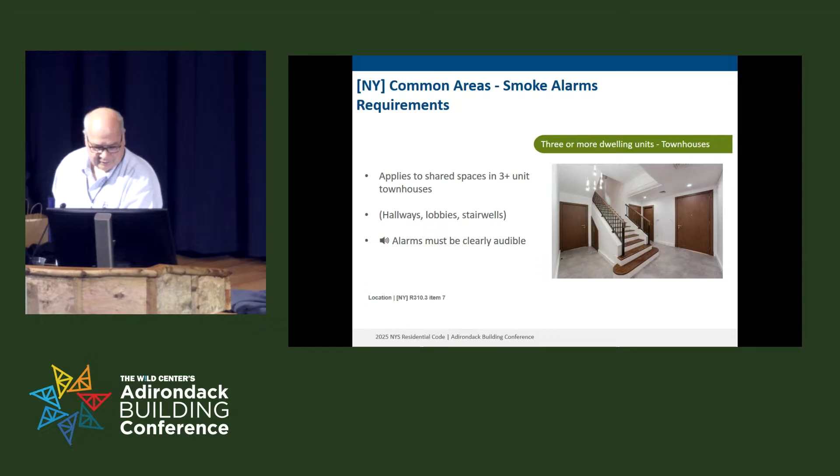When a floor area of a story exceeds 1,000 square feet, the total number of smoke alarms on that floor must be considered—this excludes the garage area. There are two approaches: the first is to ensure all points on that story have a smoke alarm within 30 feet of travel, or smoke alarms required for other reasons can count toward this requirement. Installers are wise to carefully consider placement so required smoke alarms can also satisfy this requirement, so it takes a little thinking when laying these out.

This is where the layouts start to matter. Once your area... one alarm per 500 square feet. Two versions of the same thing. How many of these am I going to have?

Clarification: the smoke alarms can be placed in vaulted ceilings over an upper floor, like where we had that ceiling height difference between the hallway, provided it is placed to serve the lower floor as required.

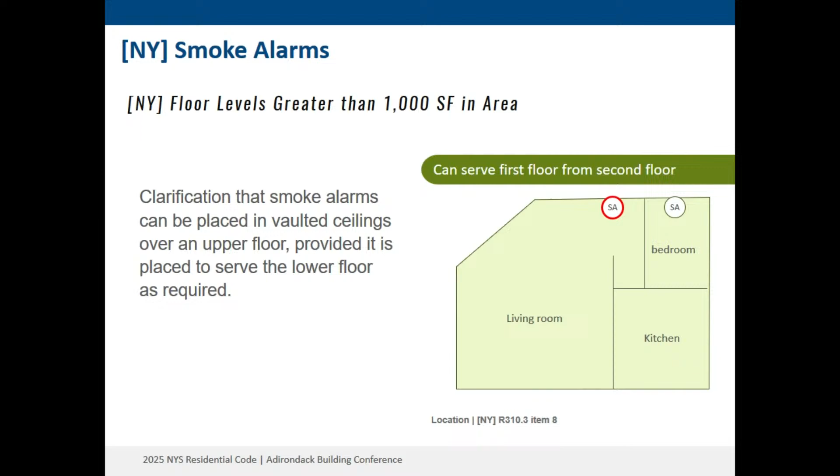Smoke alarms near cooking areas—the rules have been simplified. It's a practical change that solves a lot of real-world issues. The big picture is that the rules around smoke alarms near cooking appliances are just simpler. This comes from updates to the UL standard, not just the building code. As we talked about before with reference standards changing, we adopted a new version of the UL and it picked it up.

Another thing worth emphasizing: when you're using a reference standard, or in the back when a code section specifies a standard, it's listed in the back what version you can use. Kevin mentioned earlier about ASHRAE 62.2—the 2018 version is in our code, but they get updated every 3 years, so they're probably on their 22 or 24 now. Make sure you don't use that as your reference. If you're designing, use the 18 version—use whatever's in the reference standards, the correct version. And when you're reviewing, same thing.

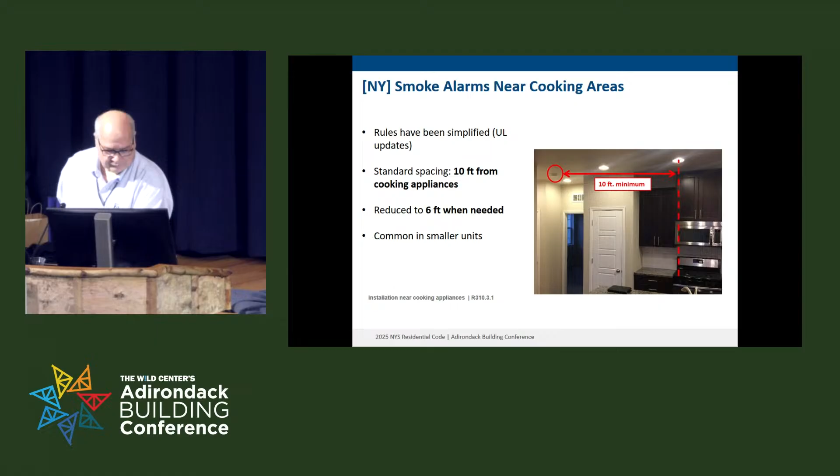You can reduce that to 6 feet when needed to meet other placement requirements, so they're giving you a little leeway—without saying do what you want, because that's what they're really saying. Keep the 10 foot in mind; you can reduce it to 6 feet from there if you need to. That helps designers a little with their placements.

Sleeping lofts—told you we'd get to it. What is a sleeping loft? It's a space designated for sleeping on an intermediate level or levels between floor and ceiling of a story, open on one or more sides to the room in which the space is located. It needs a permanent means of egress. It has to have special stairways, landings, or ladders—it needs an egress.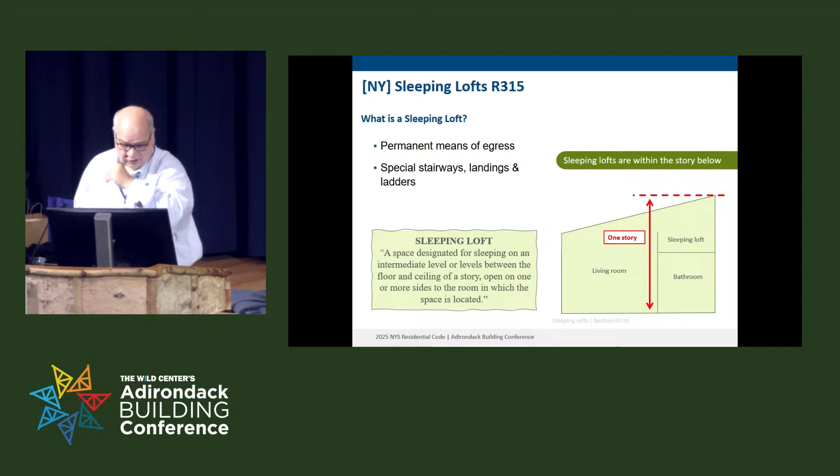But it must have a permanent means of egress, and it can have unique stairs—ship ladders, alternating tread devices, and so on. Tarzan ropes, I assume—just kidding.

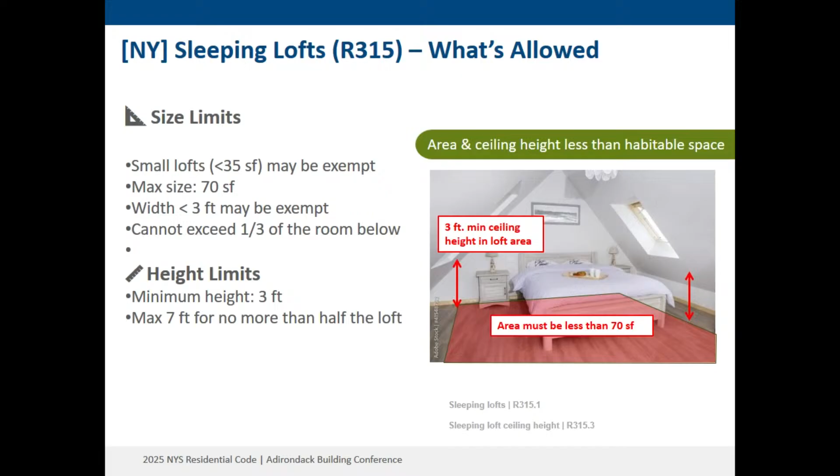They're allowed, but tightly controlled—there are limits on how big they can be. They have to be under 35 square feet... wait, they cannot exceed 70 square feet. It depends on the exit width, whether it should be above or below 35. My note said under, sorry—it cannot be more than 1/3 of the room below.

This is what we're trying to do, is keep people from creating full rooms in a loft area and having problems with it. If it's less than 3 feet wide, it may not count the same way—we'd look at it as storage or access, not livable space. The minimum height is 3 feet in the required areas, and no more than half the loft can exceed 7 feet. This is not a full-height room.

It's limited by design. I'm sure this will have some changes to what people normally would do. There are some exceptions tied to sprinkler systems—if they have sprinklers, they let you do a lot more. Sprinklers cure a lot of evils.

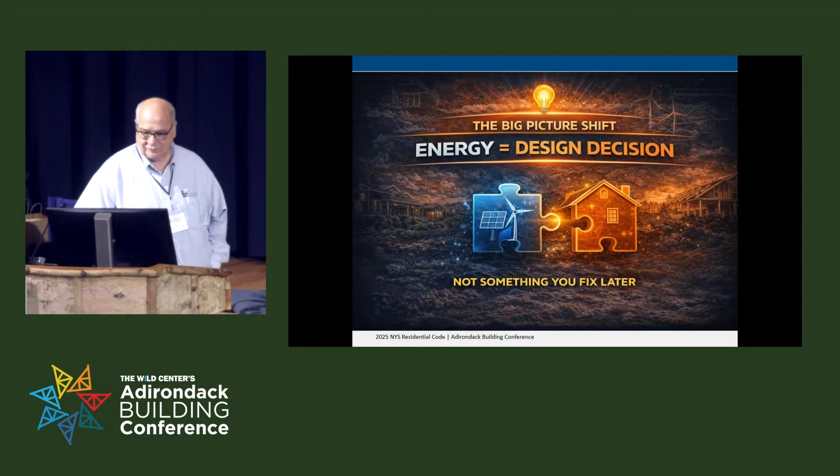Energy code, just real quick. Energy code compliance equals design decisions, not something we can fix later.

Testing is required and must be on the plans. You need the 10 R408 credits. New homes equal 10, unless it's over 5,000 square feet. There you go again—the 10 credits, this is the R408.

We keep emphasizing that because it's new—but it's not new to the 2024 code, it's new to the 2021. That's just the penalty we got for skipping. We would have had this figured out 3 years ago, but it's new to us in 2026.

Just again, the tests that are required. Projects usually fail when they're either failing the blower door, missing credits, or not coordinating getting the information right. So the impact for builders is: plan early, coordinate the trades, expect more inspections.

Folks, when you call us to schedule a blower door, don't have your painter in there touching up or painting the front door. They get pissed at us, and it's not our fault, it's your fault. That's the coordination I want. They always get mad—well, we're just going to do a blower door test. Well, what's that? We're going to blow all this dust around into your paint. Oh, okay, yeah, go ahead, do that. That's no problem.

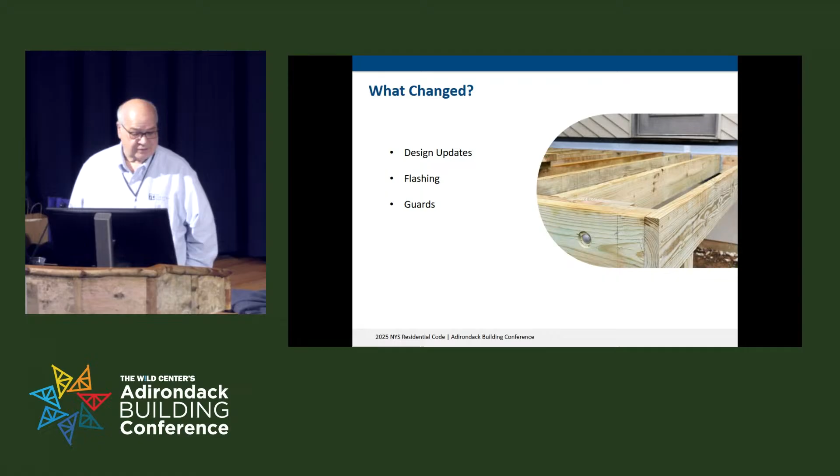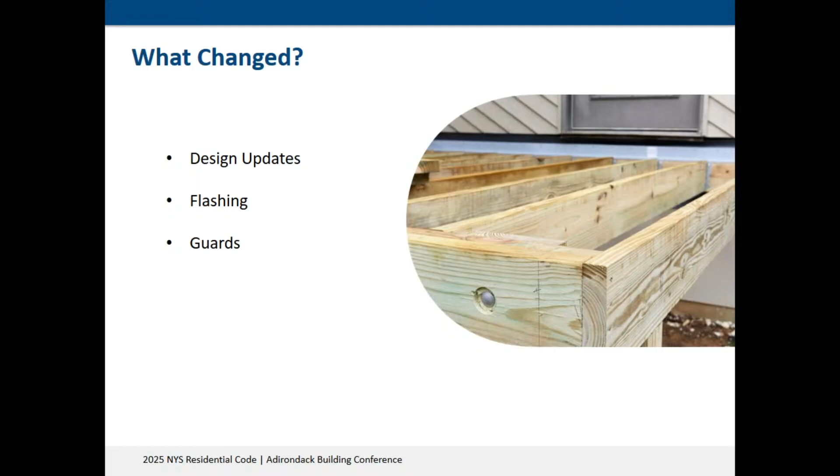Decks and structural stuff—so what's changed? There's been some design updates, some flashing updates, some updates on guards. Prescriptive deck codes have been popular in the code since the 2015 IRC, and the new residential code has some important new stuff for us to take a look at.

Decks have always been one of my pet peeves. I always felt people under-designed them and paid too little attention to it. I remember I designed one for one of my brothers, and he said, 'Why'd you make that so big?' I said, 'Well, first of all, he's bigger than I am—he's taller and at least as wide, and so is his wife. You're not building a 20 by 20 deck for just you and June to sit on and read the paper. You're going to have a party on there, and when you have that party, I don't want it celebrated on the news with my name associated with it.'

Oh yeah, really? That and the fire video from Beverly Hills—seen every major fire that's happened in New York State. Just, if you guys aren't aware, the code enforcement officer training in New York State is one of the most stringent in the country. It's 120 hours, it's 6 weeks—around 120 hours of training, all those courses, and they have to pass a test afterward, but they used to give them the answers. Not anymore, though, because a lot of it's done online now. But it's a lot. I'm not here to make you guys feel great, but it's an endurance test if nothing else, because it's boring as can be. Think of this 2 hours, how bad it is—can you imagine all day for 3 days, then 3.5 days? It's crazy. 4 days, yeah, 4 days by the time you're done.

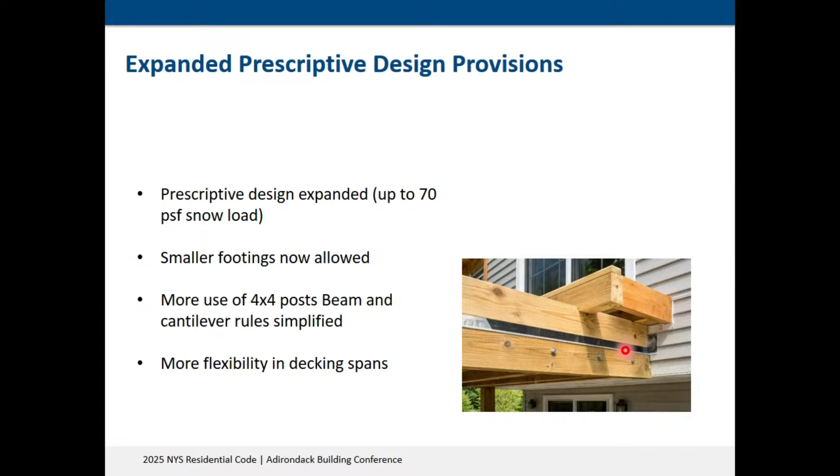So anyway, the good thing is they made this section easier, right? It's one of the few areas the code made easier for us. You can now use prescriptive deck tables in higher snow load areas, up to 70 pounds per square foot, so fewer engineered designs. Before, they didn't go up to 70. They've changed that. The footings got smaller.

Right now, the minimum footing diameters were reduced, and this is important, 14 inches is no longer the default minimum for clay. They also added a smaller 5 square foot tributary area option. So they've made it a little bit easier for us with footings.

They've changed how we can use 4x4s. They're letting them be used a little bit longer, more often—they've expanded the use for 4x4s. I'm not crazy about that. I don't even know why you would do a 4x4.

This stuff's going to be coming up in your inspection, so make sure, because these guys have heard it, so now they're going to look for it. They knew it anyway.

If you ever tried to size beams with different cantilevers, it used to be kind of a mess. Now it's a lot easier and more straightforward. They took a lot of guesswork out of it. The limits are tied directly to the cantilever limits, and they're tied directly to the joist span.

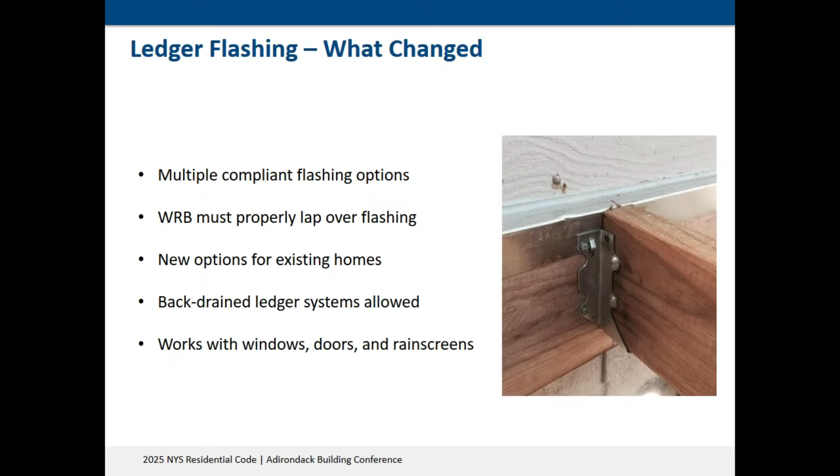I would think, do you have much trouble getting people to use the lateral supports, like the DTT2Zs, when it first came out, probably, right? Yeah, we have a couple designers in the area.

So flashing is one of the problems. The code now gives us options, but you have to use them correctly. No longer just one way to do ledger flashing—there's different sections for different conditions. Refer to the code, take a look at it.

You can use back-drained ledger systems, works with windows, doors, and rain screens, and so on. You can also use self-adhered flashing over the face of the WRB for counter flashing. So, what did you say Steve Rick calls it?

Tucking your raincoat into your pants. That's what that sounds like to me, though, right? It doesn't make any sense to me. But the code says it's okay. I have to send that to Joe.

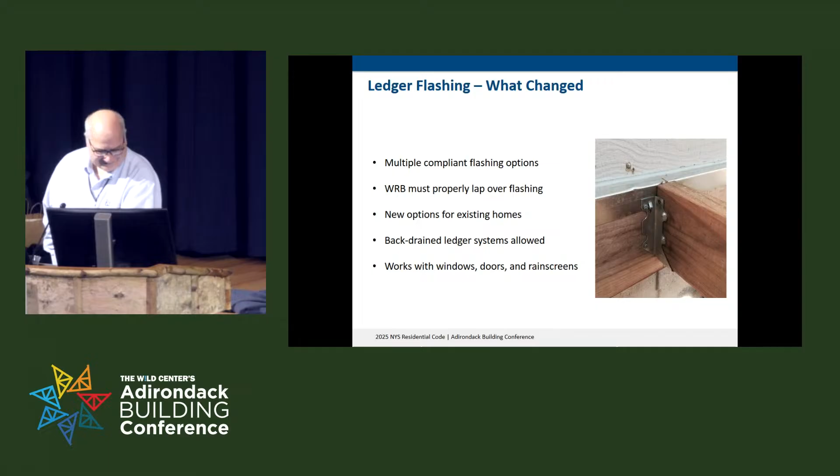Guard posts—they've done some stuff with the guard posts too. They have to resist rotation; the way they want you to install them is to prevent rotation. They have to be connected to framing or blocking, and they cannot notch the 4x4 posts.

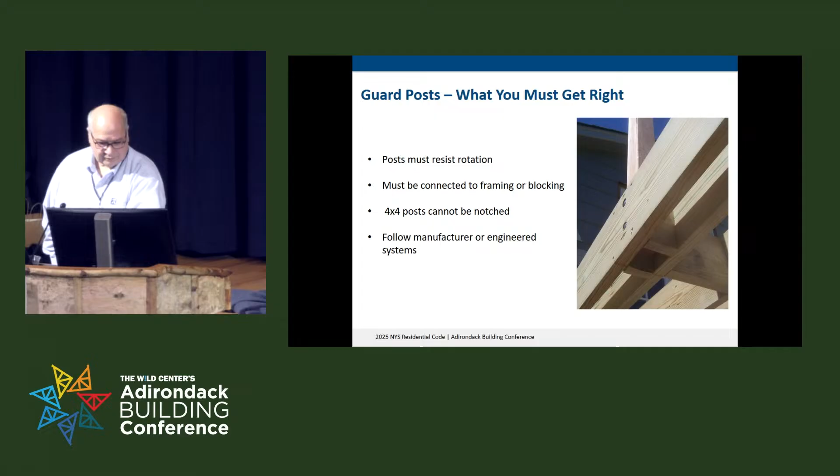And lastly, you'll be surprised for me to say this, but you need to follow the manufacturer instructions for engineered systems. That sounds silly to me, but... so, we're down the stretch here.

Wrong separation, like in townhouses where you've got to account for the fire separation distance versus just a common wall type of thing. Poor documentation—we don't give them what we're looking for.

Inspection failures because we're modifying deck hangers, and so on. Parking our boat in the garage is probably an issue—hey, what happens if you park your boat in the garage? Is it still a garage? Even if it's on a trailer? Trailers are considered different, they don't have motors.

Okay. I get punchy this time of day.

Flashing mistakes are huge, all over the place. And not just for the structure, but the durability and resilience of the building, and the energy, because wet stuff doesn't work as well. You've got to make sure you do the flashing right. You don't need these decks falling off, you don't need the roofs prematurely failing, and so on and so forth.

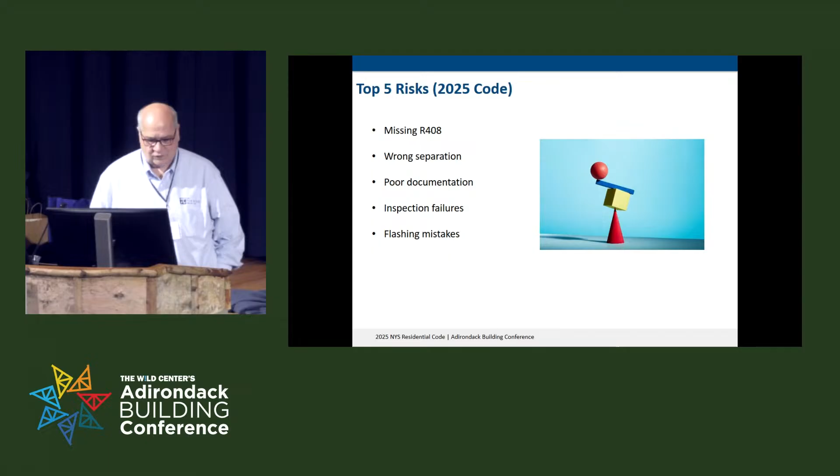What's next? So who needs to do what?

The builders, you need to build it right. Whoever you guys are, build it right, which I'm sure you are, you have been. You've been building it that way for 40 years. Why do you got to change now? Or 50 years, depending on what it is.

But no, make sure your fire separation is correct, the materials and the details match the plans, and make sure that you're complying with the plans in the field. Designers, make sure that you put out code-compliant plans. I know you always do, at least in your opinion, or in our opinion too.

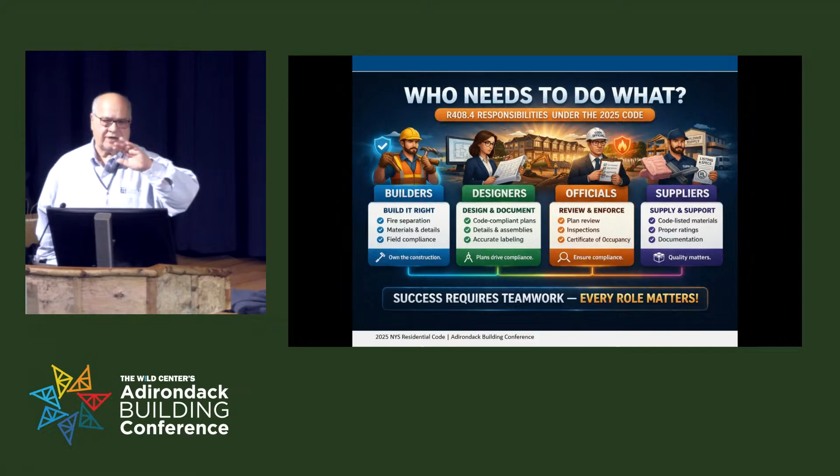Make sure you have the details in the assemblies. I'll give you a hint for a place to go look for some of these details that we're looking for, at least on the energy part and maybe more: Building America Solution Center. Just Google it. It's from PNNL, I believe, or something like that. They've got CAD details, drawings, pictures, references.

It's a great site. They even let you try a wall out if you want to see if your wall is good for thermal resistance and for water or moisture resistance. They've got a section on there for that. It's free, it's cool, there's no copyright problems. Building America Solution Center—if you Google it, you'll thank me.

Officials, review and enforce, be nice. They're going through a lot of changes, we're going through a lot of changes. Be nice on how you deliver the news, right? But you've got to obviously be thorough.

I think you've got some new checklists coming out soon. So, three weeks ago—last week—Ron Stark said that he was supposed to have them that week. That's who told me that three weeks ago. Yeah, I know, he's been telling me that for four or five months. But supposedly you're going to have some new checklists coming out. Don't forget that pesky certificate of occupancy as well, right?

Suppliers, if there's any suppliers still here—they're your biggest source. Designers, builders, even code officials, the suppliers are a great source for you. Maybe not themselves, but their manufacturers. And keep in mind, the biggest changes to the codes came in the 2021 version.

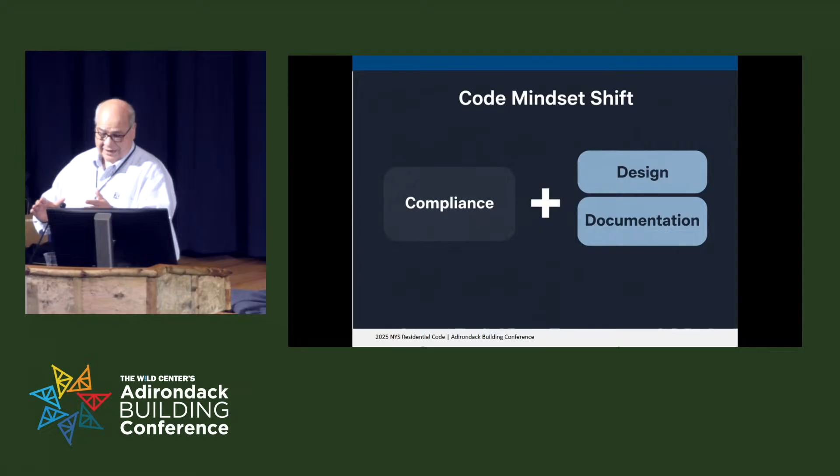The other thing you're going to start seeing is the codes, as they change, are going to become more performance-driven, more design and specification-driven. There's still going to be a minimum standard, but on the energy code you're going to start seeing, like Kevin said, R60 was a waste of money—well, he didn't specifically say it that way, but I've been saying it for a while. They aren't going to do that anymore. They're going to be more testing and verifications, proving that what we're putting in there is working. The only way to do that is with the ERI path. So, anyhow.

Come up with an action plan: update your plans, train your teams, coordinate early, plan early to control your cost. If you wait, the code controls you. If you plan for these changes early, you control the cost, the schedule, and the inspection risk. If you wait until the inspection, the code will control you.

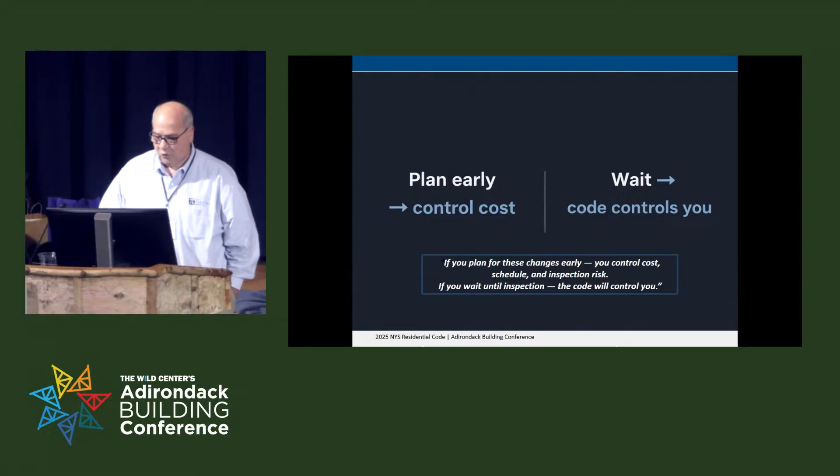And with that, I'm going to open the floor up to questions if you have any. If not, I think it's going to be happy hour. Oh, it is. You got twelve minutes—that's exactly what I planned on. But anyway, questions? Yes, sir. Just— No, I didn't.